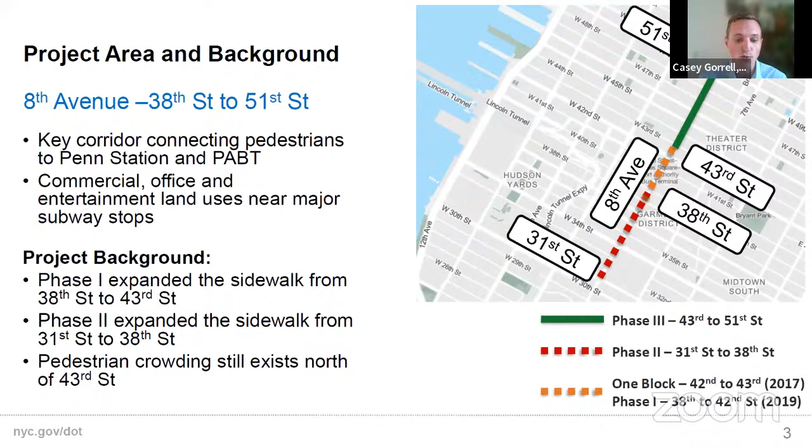And following those two phases, we still identify that there is severe pedestrian crowding north of 43rd Street. So that is what today's proposal is for.

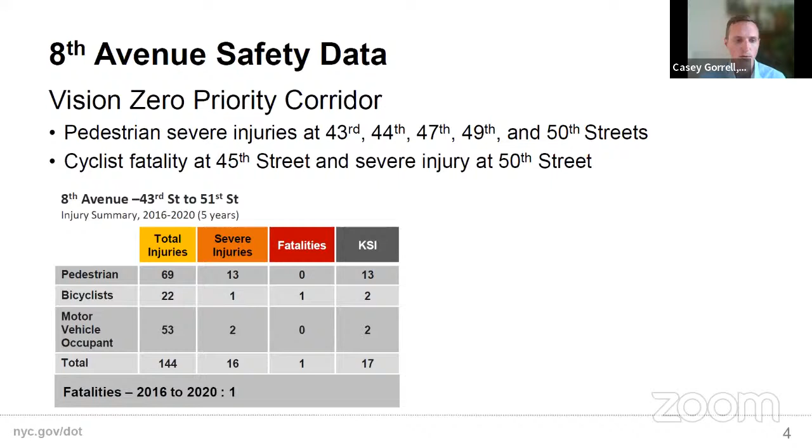Looking at the safety data, 8th Avenue is a Vision Zero priority corridor, and it's also within a Vision Zero priority area. There have been pedestrian severe injuries at 43rd, 44th, 47th, 49th, and 50th Streets, and there was a cyclist fatality at 45th Street and a severe cyclist injury at 50th Street. So definitely an issue with pedestrian injuries and also cyclist fatalities.

Existing conditions: currently, the blocks of 8th Avenue in this section have two 15-foot wide sidewalks, 4 general travel lanes, a parking protected bike lane, and curbside uses that are a mix of parking and loading with bus stops, hotel loading zones, and 3-hour metered commercial loading and parking. So it's our very typical avenue layout in this section.

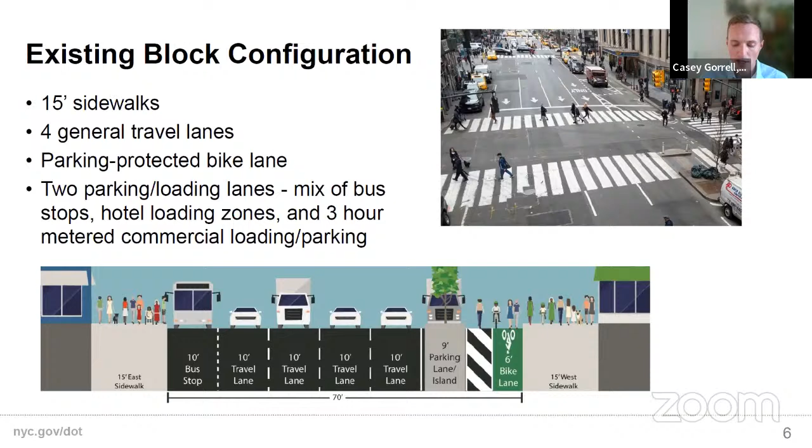Looking at who's actually using the roadway, pre-pandemic pedestrians accounted for almost 88% of roadway users, almost 12,000 pedestrians in the peak hour on this section of 8th Avenue near 45th Street. Vehicles made up about 1,300, or 10%, and bikes a little over 300, making up 2%.

We took recent data in June 2022 as businesses are reopening and office workers are coming back into the city, and found that even with quite a substantial decrease in pedestrian traffic, pedestrians still made up almost 82% of users, almost 7,400 people in the peak hour.

These very high pedestrian volumes and the associated lack of space, because pedestrians actually only have 30% of the roadway allocated to them, results in people walking in the curbside lanes, typically in the bike lane on the west side of the street.

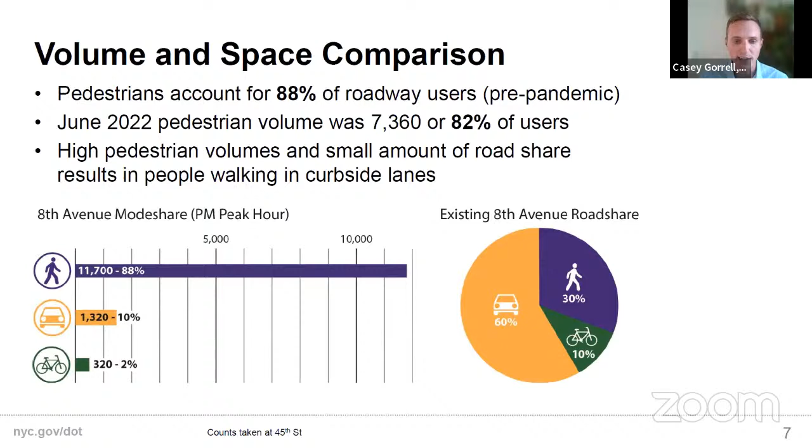So our proposal, similar to other phases, is a large 19-foot wide painted sidewalk extension on the west curb, maintaining the parking and/or lane divider protected bike lane, maintaining 2 general travel lanes, and adding left turn lanes as needed. We'll also be making curb regulation changes to match the surrounding neighborhood context by extending the meter regulation to midnight to match those late night land uses.

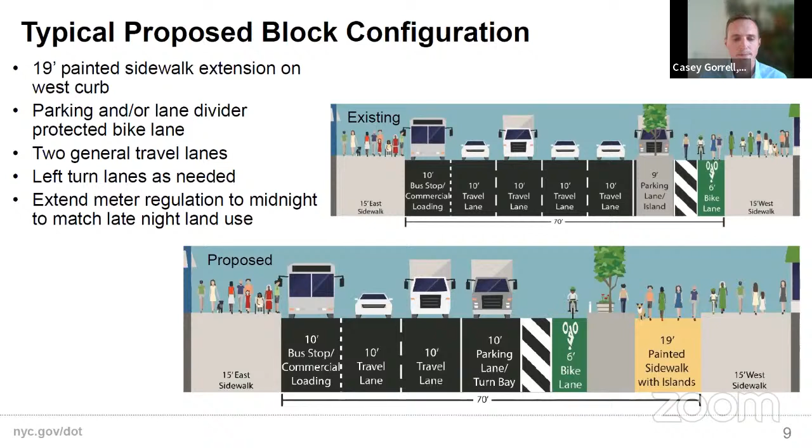I'm going to go through this proposal in 2 block segments to cover the quirks of each section, as not every block is the same. Starting at 42nd Street, where we have the existing sidewalk expansion installed in 2017, there's an existing split phase left turn at 43rd Street with the existing painted sidewalk.

We're proposing to widen this painted space at the corners to improve pedestrian circulation. This includes making an adjustment to the taxi boarding island at Port Authority Bus Terminal. We'll be adding commercial loading spaces to the block between 42nd and 43rd.

This is to accommodate curbside uses and neighboring land use. We see a lot of trucks parked in that turn bay, so there's definitely a need for commercial loading. The bike lane will transition at 43rd Street around the proposed sidewalk expansion that continues between the 2 existing bike islands. We'll also be maintaining the existing split phase left turn at this intersection.

Moving to the next section, this is the block from 44th to 46th. There's an existing offset crossing at 45th Street that was installed as part of phase 1. We're proposing to again expand the sidewalk on the west side, switching the offset crossing to a split phase left turn to separate turning vehicles from cyclists and pedestrians. We'll maintain the floating parking and loading lane in this section to accommodate drop-offs and deliveries.

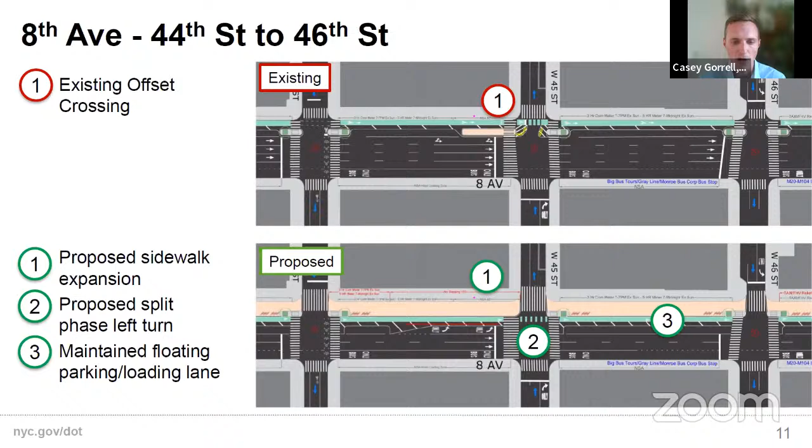Moving down the block, there's an existing mixing zone at 47th Street. The proposal continues the painted sidewalk extension. We're proposing another split phase left turn at 47th Street, and again maintaining parking and loading on the west side, mostly for commercial loading.

Next section, from 48th to 50th, there's again an existing mixing zone. There's also an existing Citi Bike station in the floating parking lane between 49th and 50th Street. We'll be continuing the sidewalk expansion, swapping the mixing zone for a split phase left turn. Because we're expanding the sidewalk so much, we can maintain the Citi Bike station in its current location and add back some commercial loading spaces to try to mitigate double parking issues in this area.

The final section is from 50th Street to 52nd Street. Again, an existing mixing zone at 51st. We'll be changing that for a proposed offset crossing, continuing a partial sidewalk expansion up to 51st Street, and maintaining the floating commercial loading lane on this block as well. North of 51st Street, we transition back to the existing cross section.

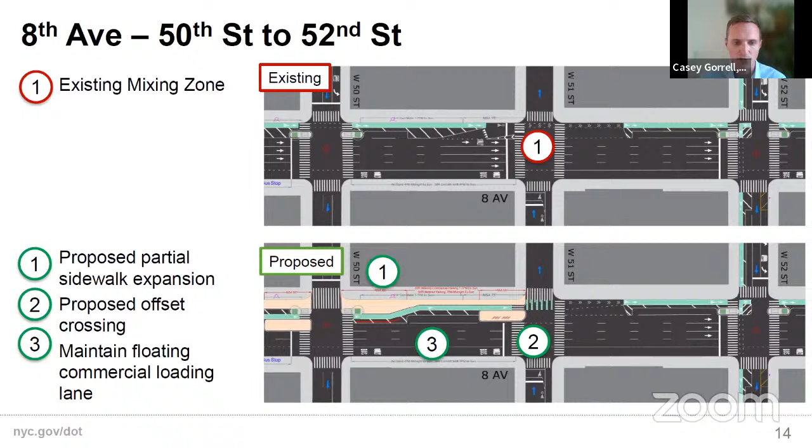Looking again at that volume to space comparison, a reminder that pedestrians make up 88% of roadway users. We're increasing the space they get by 19 feet, upgrading from 30% of the space to giving pedestrians half of the right of way.

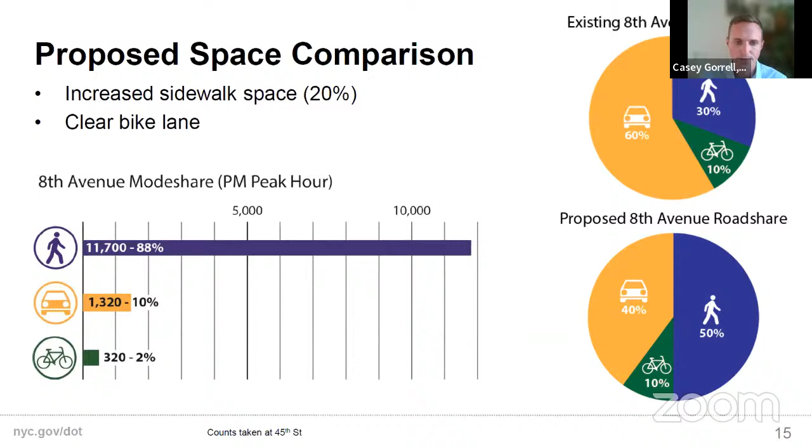As for project timeline, currently 43rd Street to 51st Street is milled and is scheduled to be repaved by the end of July. Following that, we will be installing markings in August and September on that fresh asphalt.

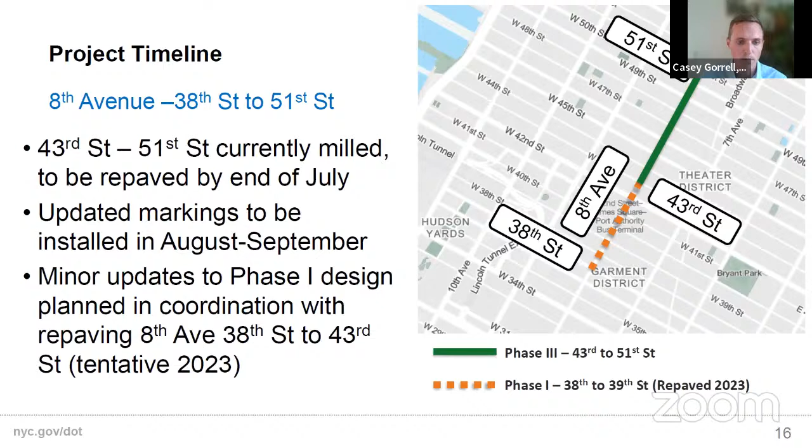As part of this process, we're also going to be making minor changes to the Phase 1 design, which will be in coordination when the section of 8th Avenue between 38th Street and 43rd Street is repaved in 2023. I'm going to give a brief update on those changes, which will happen next year.

So this is the block of 38th Street to 39th Street. As part of Phase 1, we installed the painted sidewalk expansion and upgraded to a split phase left turn. As part of this change, to better match the cross section to the south, which was Phase 2, where we had 2 travel lanes, we'll be removing 1 additional travel lane between 38th and 39th.

This allows us to shift the left turn lane to put in a hotel loading zone and some commercial loading. There's a Holiday Inn mid-block on that section, and they see a lot of drop-offs and taxi use. Accommodating those uses allows us to keep that left turn lane clear and improve visibility in the crosswalks to the north. This will get the standard hotel loading zone treatment with a painted island, which will keep vehicles from entering the bike lane.

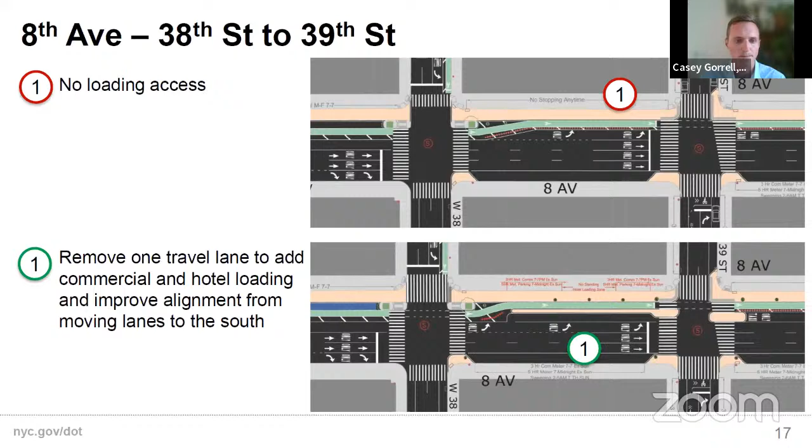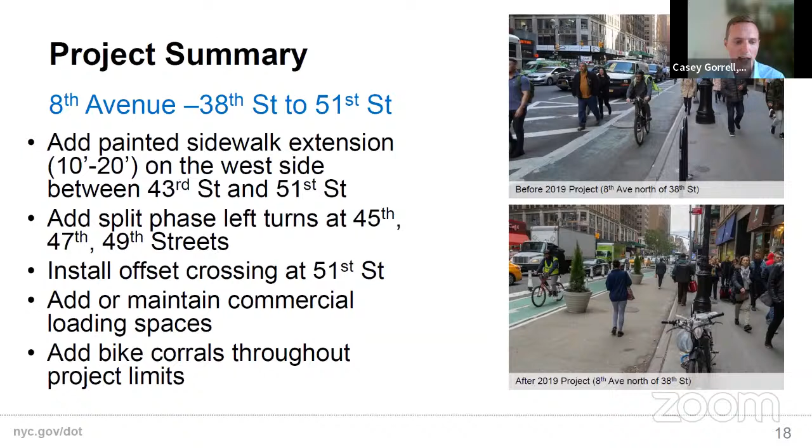So in summary, we're adding a substantial painted sidewalk expansion on the west side from 43rd to 51st Street, adding 3 new split phase left turns, installing an offset crossing at 51st, and adding or maintaining commercial loading spaces to accommodate surrounding land uses. As part of the project, we'll be adding bike corrals throughout the project limits.

So at this time, I would open it up for any questions, and then following that, I can move into the 9th Avenue presentation.

Sure, thank you so much, Casey. I'm just going to reflect some of the conversations we had earlier. We talked earlier about the potential conflicts of the restaurant sheds that are in this area while the work is underway. As I understand it, one of the restaurant operators has already been notified of the work, at least one. Do you have any more color on that topic?

So we're actually having a walkthrough with our open restaurant team tomorrow to go up and down the corridor. So we'll have more information then.

Great. And then can you go back to the slide that shows 42nd, I guess it's 42nd to 44th? So the proposed sidewalk extension is narrower along the block between 42nd and 43rd than much of the proposed area. Is that correct? Yeah, so one of the comments at the previous meeting was to widen that space.

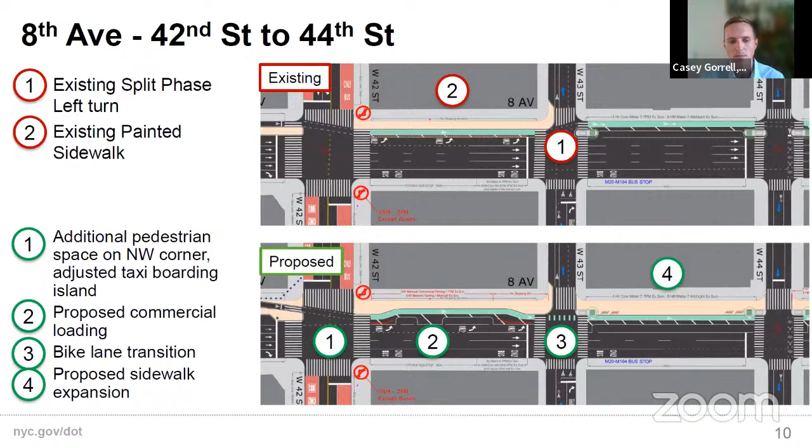So we actually ended up doing kind of large curb extensions with the painted treatment at both ends, which increases storage capacity when people are queuing for the signal. So that was one change we made - those bulb outs are a little widened at the corners. Yeah, it'll be 20 feet wide at the corners.

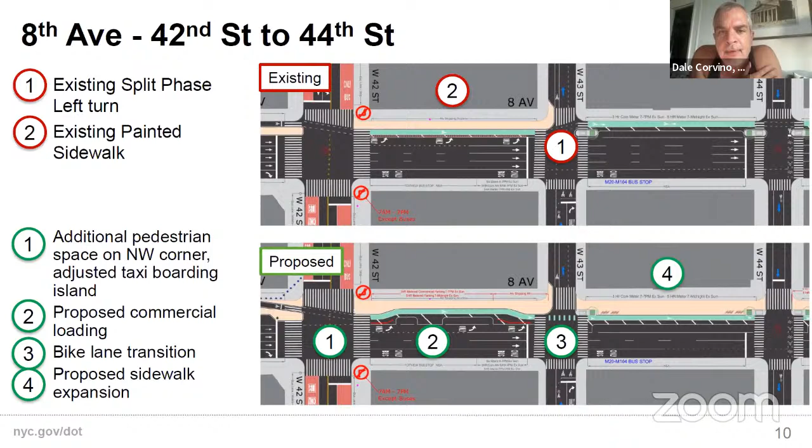Right, and you mentioned that the block between 47th and 48th, you're looking now at loading areas or commercial parking. I can't remember, I know we discussed those options. Yeah, 47 to 48 is going to be 3-hour commercial meter commercial loading.

Great. And then I think these plans indicate along the bike lanes that there are flexible delineators or other forms of vertical protection? Yeah, so wherever there's no floating parking, we're proposing what's called Qwick Kurb. It's the more robust vertical separation that's currently in most of Phase 1. So we'll be doing that wherever we don't have any parked cars or any parking protection - we'll have a vertical separator.

All right, great. I'm going to open it up to questions from the committee, starting with David Warren.

Hi, thank you for your presentation, I appreciate it. I have 2 questions. One is on 8th Avenue - when I'm riding between 31st and 33rd, somewhere mid-block it starts out for pedestrians, and even sometimes the Citi Bike people block it off with stuff, and then we go into the bike lane. Then I'm confused because at about, let's say, at the light where 32nd would be, it wants you to veer back left to where the pedestrians once were and go straight up. I don't know if it wants that, because otherwise it would lead you into traffic, but it's very hard to finesse the way the turn is and the way the cement dividers are. So I don't know how you plan to either communicate it better or move the dividers or what. My second thing is, I think the pedestrian protections are great, but what are the protections you're going to have for cyclists? How are they being - what is the protection? I hope it's not plastic bollards.

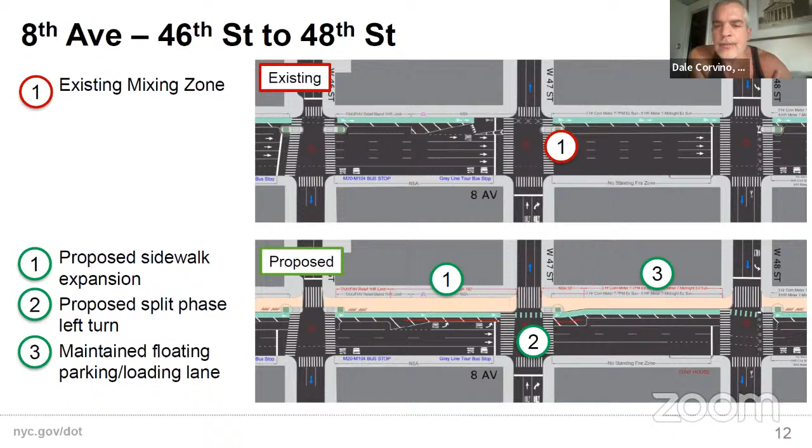Yes, I did itemize that, David, but I'll rely on all of you to make sure we've captured it once we write the letter, because I want one section of this letter to discuss current conditions with respect to the current construction enclosures and staging areas, so that the bike lane is maintained during that period. Because I'm very concerned about this construction, staging, and all that.

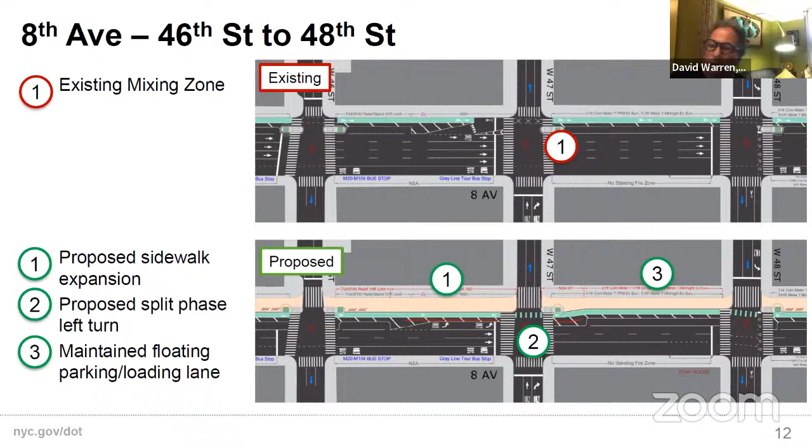These guys are weasels, so we can't let them get away with it. We won't use the word weasels, but we will ask DOT to bring these concerns to bear, whether it's DDC or Con Ed.

So that's the motion. Can we have a vote on that motion? We've had a second. All in favor of that letter to capture our discussion? Any opposed? Any present not eligible? No. Okay, thank you so much for the presentation.

I suppose now we can move on to your portion of the 9th Avenue presentation, then we'll bring in Vornado. Then may I ask you one quick question, if you don't mind?

Yes, sorry. We spoke about making this change permanent as far as the sidewalk extension is concerned. Will we be writing a separate letter about that? I don't know if that's a separate letter, or if we can say within that letter, we look forward to the capital project, which would have expansions of sidewalks on both sides.

And also, to Carl's point, about potential expansions to the north of the extended sidewalk. I think it can be captured in this letter, and I'll rely on you, Viren, to read through it once we draft it to make sure I'm capturing all your concerns, because I do think that's important. These temporary build-outs are not perfect, but I think they set the stage for future improvements.

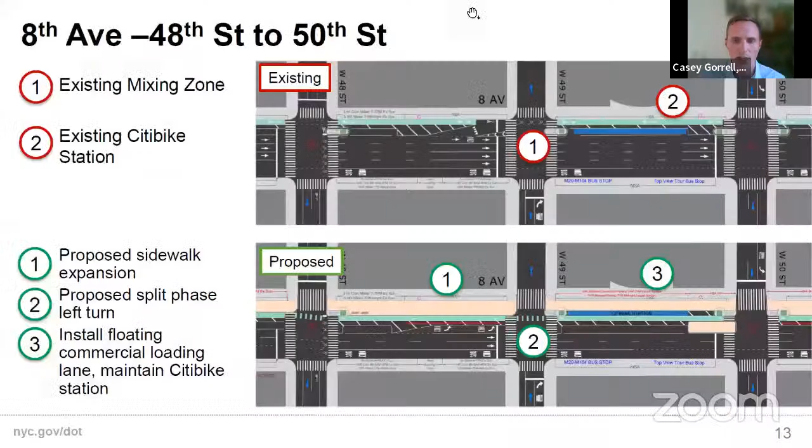Yes. Okay, so Casey, back to you on 9th Avenue. Let me get everything back. This one's going to be quick, because Vornado is actually probably going to go into much more detail than I am.

Hello again. I'm going to present an update on 9th Avenue from 30th Street to 34th Street. A little project background: there's been a long-standing DEP project to upgrade water mains throughout the district. I'm sure everyone's aware of that work. It's been a huge undertaking and probably a very big pain. There's also been the ongoing redevelopment of Moynihan Station on the blocks between 31st and 33rd.

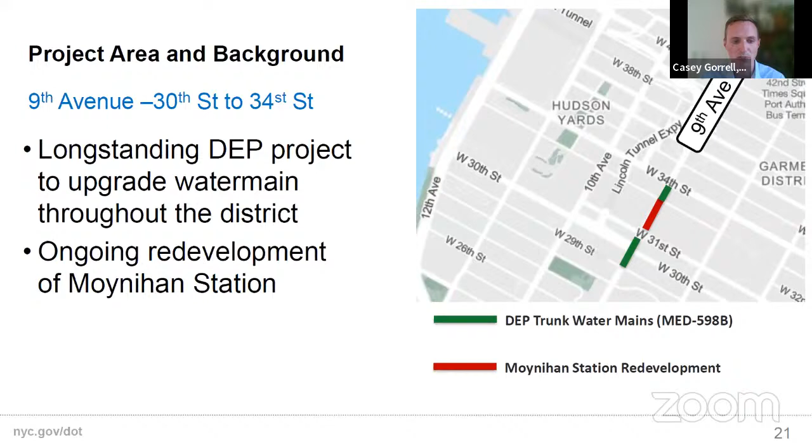So I'm going to show here what is considered the existing condition, although that's a bit of a misnomer because it probably hasn't looked like this for almost 10 years. This is technically what would have been put back into the ground if nothing was changing. We are proposing a series of changes in coordination with the Vornado work, to be implemented as part of the DEP roadway restoration from 30th to 31st and from 33rd to 34th.

Currently working from south to north: at 30th Street there's an old existing mixing zone for southbound left turn onto 30th Street. Prior to construction, there was a USPS access for a section of 9th Avenue heading northbound, essentially to what would have been 32nd Street. This is no longer needed with the change from the USPS Farley Post Office into the Moynihan Station.

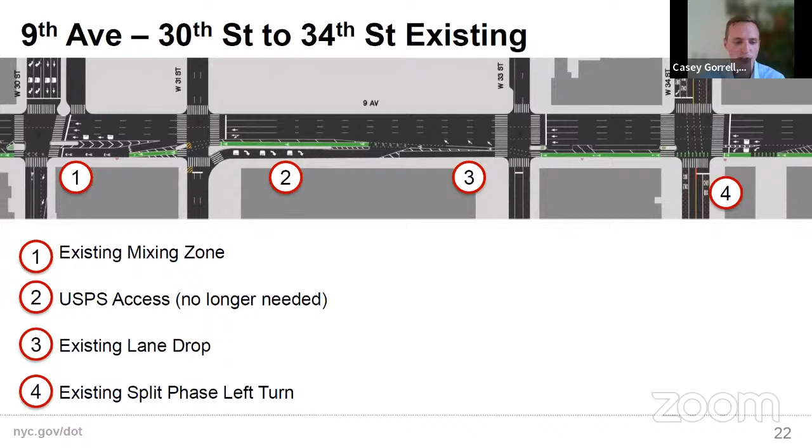Looking at bullet number 3, at West 33rd there was a substantial lane drop, going from 5 lanes to 3 lanes, 5 lanes to 4 lanes - a big pinching of 9th Avenue, mostly to accommodate that USPS access. And then at 34th Street, there's an existing split-phase left turn.

So under the proposal, again working from south to north, we will be converting to an offset crossing at 30th Street and widening the eastern sidewalk with temporary materials. However, at this location, we are proposing concrete islands as part of the DEP restoration.

They'll be shifting the islands to their new position to allow for the wider sidewalk. From 31st to 33rd, Moynihan with Vornado will be widening the eastern sidewalk and adding the mid-block crosswalk, which has already been completed, and constructing 3 pedestrian islands.

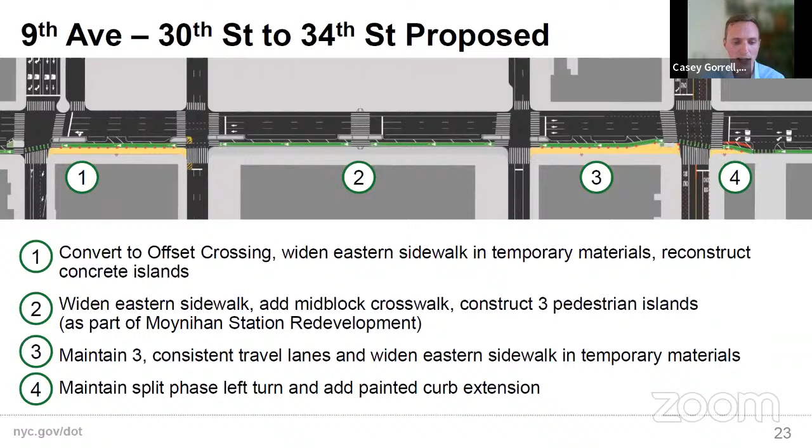Between 33rd and 34th, we'll be maintaining 3 consistent travel lanes and widening the eastern sidewalk with temporary materials to create a consistent 9th Avenue roadway profile. At 34th Street, we'll maintain the split phase left turn, but add a painted curb extension to better align the bike lane around the new islands, along with painted sidewalks.

Just a quick summary: we're widening sidewalks between 34th Street and 30th Street, creating consistent and clear travel lanes, and creating consistent bike treatments at intersections through this portion of 9th Avenue.

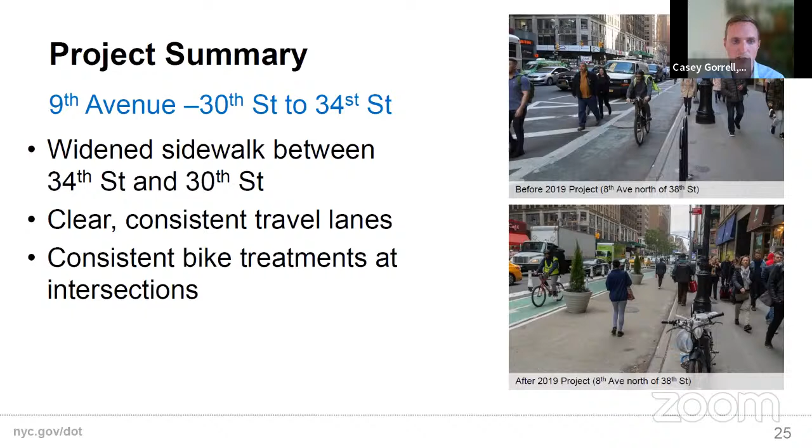So I can also open up for questions. If you have any questions regarding the blocks between 31st and 33rd, it might be better to wait for those once Vornado has presented. I think perhaps what we'll do is go right into Vornado's presentation, then we can discuss it as a whole. Yeah, that works. I can stick around.

And who do we have here at Vornado? Hi, Alan Reagan, thanks for having us tonight. I've been involved with the Moynihan Station project since 2017, not as long as some others, but I've worked on the train hall portion and the private development portion. Joining me tonight is Michael Grieser from SOM, which has been involved with all 3 phases, and Jake Eckersley from Langan, also involved in all 3 phases of the project.

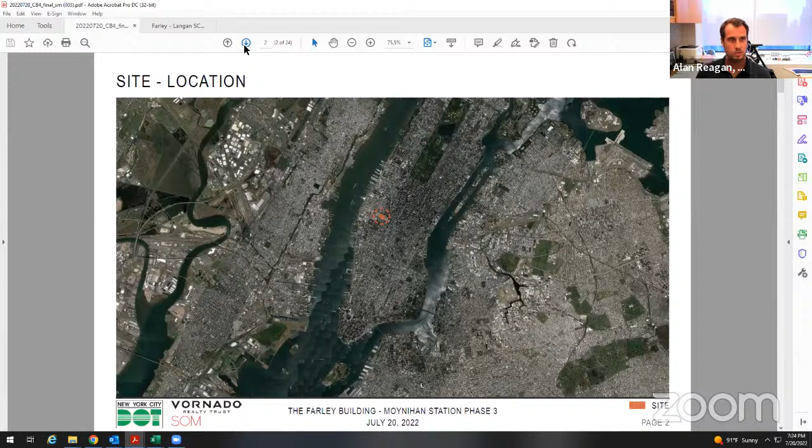Okay, so just an overview shot of the building. Everyone, I think, knows where the project is, but just in case, it occupies the full block between 8th Avenue and 9th Avenue from 33rd to 31st Street. It sits on top of the busiest transit hub in the country and is an extension of Penn Station.

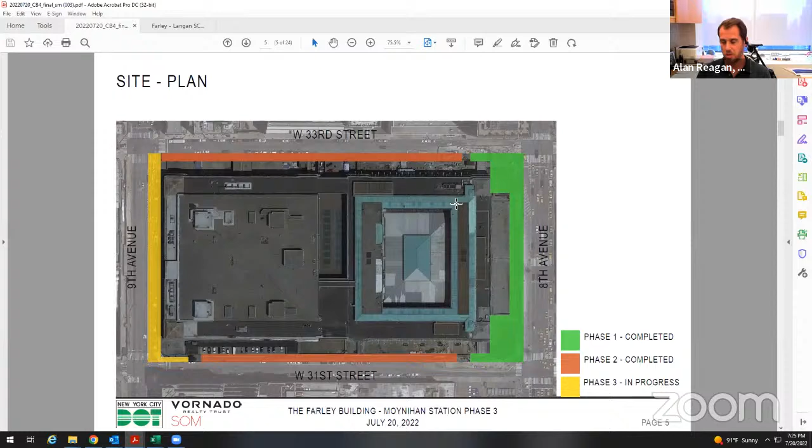That was completed in 2017. Phase 2, in orange, was completed at the end of 2020. That extended the bollards down 33rd and 31st Street and put the distinctive sidewalk at the 2 other mid-block train hall entrances. Just some completion photos of what is there now.

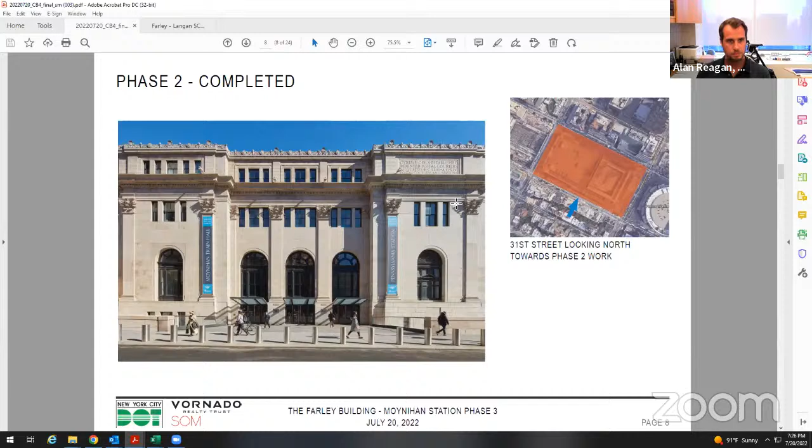This is the 31st Street mid-block entrance. This is the 33rd Street mid-block entrance. Just another view.

Section through the building, showing it connecting from 9th Avenue to 8th Avenue, and connecting over to Penn Station underground.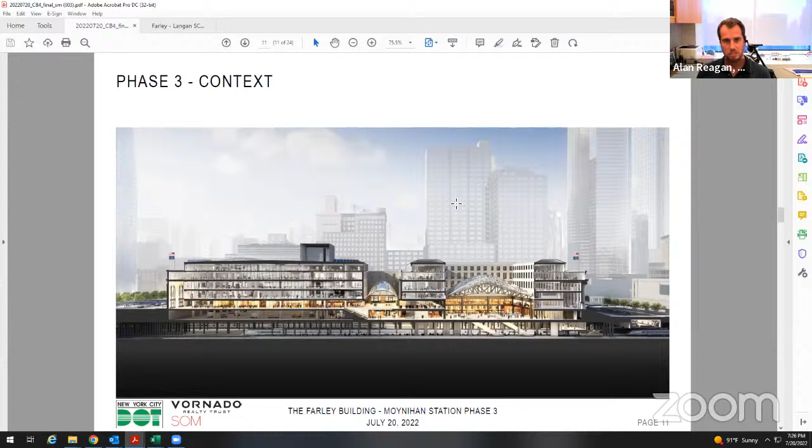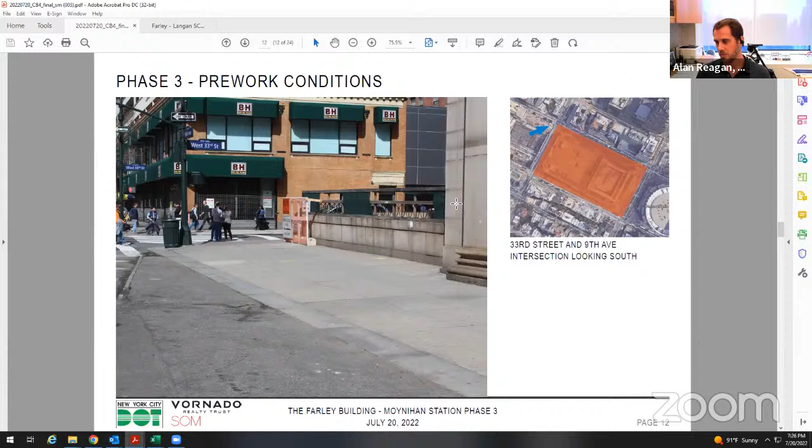These are the pre-work photos, what we like to call it. It wasn't the existing conditions because as you walk there today you'll notice the condition doesn't exist. But these are the pre-work conditions where USPS had the reverse drive lane on 9th Avenue, where they would come down 31st Street and turn up 9th Avenue to get to their interior loading dock, effectively at 32nd Street.

As part of this project, we relocated all of USPS's loading facilities onto 31st Street and provided them a below-grade ramp that goes from the street down to the concourse, moving all of this loading facility that was on the first floor down into the cellar of the building. That frees up this area, allowing the sidewalk to be extended, and these 3 grand entrances to be converted to the 5th train hall entrance along 9th Avenue.

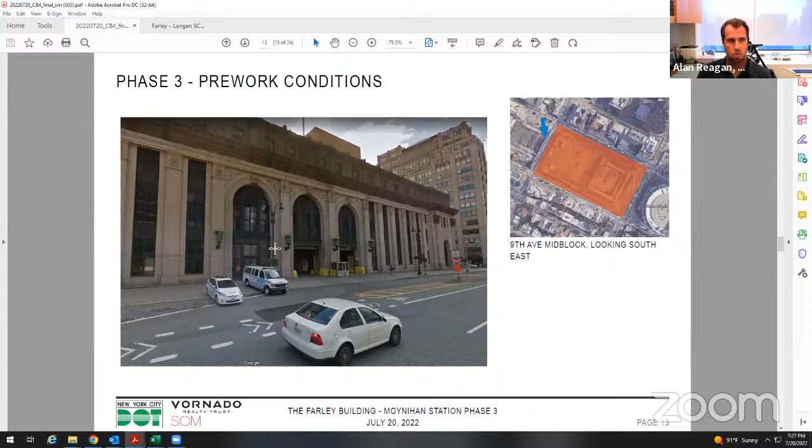And it aligns to Manhattan West Brookfield's Park directly across the street, where there's a temporary crosswalk today near where the permanent crosswalk would go. This is just another angle from 31st Street looking up 9th Avenue of the reverse drive lane for USPS.

Everything, the two on 8th Avenue and the mid-block paving on 33rd and 31st Street, that's all within the property bounds. The building is set back and surrounded by moats on the north and south sides, and the grand steps on 8th Avenue. The difference is the building was created in two separate times. When the back building was created, it was effectively flush to the property line.

So we're here for the community board to ask for the distinctive sidewalk. We're also giving you a preview of the bollards, although we know we can't officially ask for bollard approval until DOT is further along in the revocable consent process. We thought it was important that the community board, having seen this two other times, knows we're ready to start the work once we get through the DOT process for the bollards.

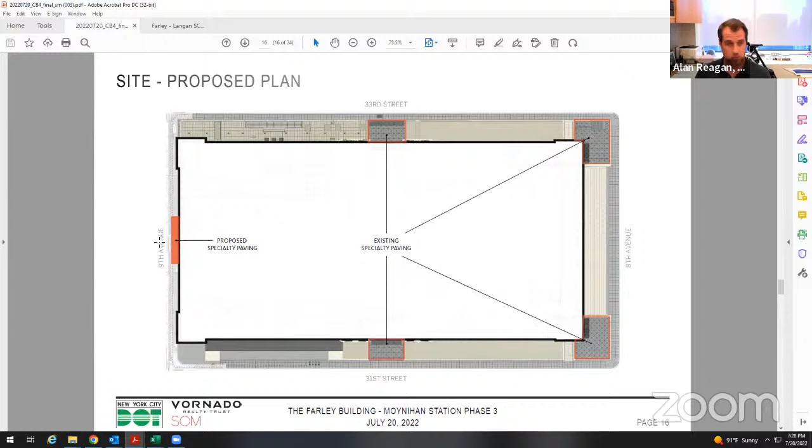So this is just a blow up of where the distinctive sidewalk is. It'll be 90 feet by 34 feet, roughly speaking, and it'll align to those 3 grand entrances that link 32nd Street to the train hall.

So all of this sidewalk will be maintained by the condominium building. It's currently managed by C&W, which handles all of the sidewalk and the interior common spaces of the building.

Additionally, we will be extending the bollards that go down from 8th Avenue and on 33rd and 31st Street all the way across 9th Avenue. Part of this project has involved a lot of back and forth because 9th Avenue has a ton of utilities in the street. It's also a shallow street because of the viaduct for the trains. So we've been working with Casey and John at DOT on geometry that works for everyone, along with DEP on the water main relocations.

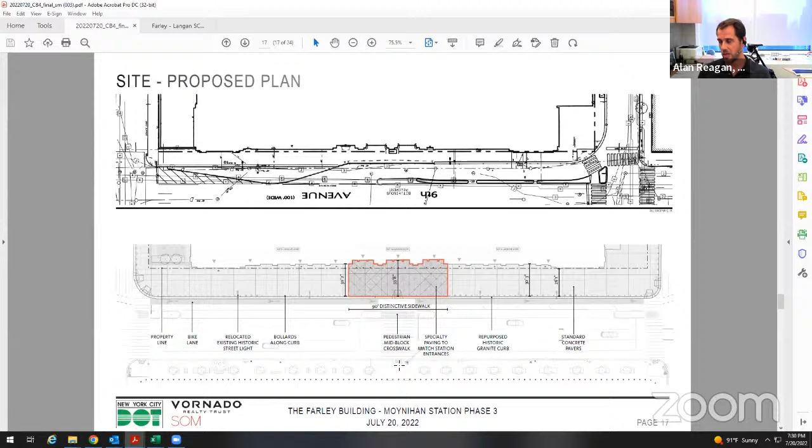As noted previously, the building has standoff distances on 8th Avenue, 33rd Street, and 31st Street. In order to give it standoff distance for security measures, we need to extend the sidewalk. We're extending the sidewalk, effectively grabbing the reverse turn lane that's no longer needed, while still maintaining the bike lane, giving a grander pedestrian experience, security from bollards, and installing the permanent mid-block crossing, which has been fully coordinated between our building and Brookfield on the west side.

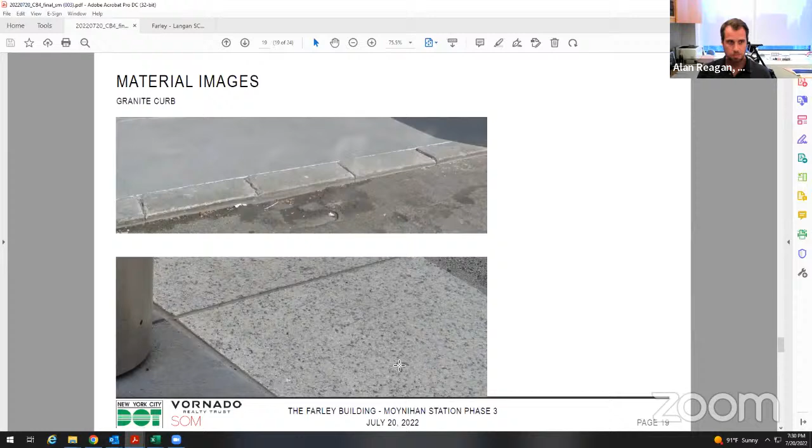This is just information on the material we're going to use. These are photos of the existing granite curbs. We're going to put back granite curbs. We're going to use the same bollards as phase 2 and phase 1 used, the same bollard covers, same rating. And this shows the full extent and array of the number of bollards we're putting there.

We've worked closely with DEP to fit the bollards in over their infrastructure. Con Edison is doing utility relocates, which they'll pick back up after the summer moratorium, sometime around end of August or beginning of September, to allow us to start this work once we get through the final DOT process.

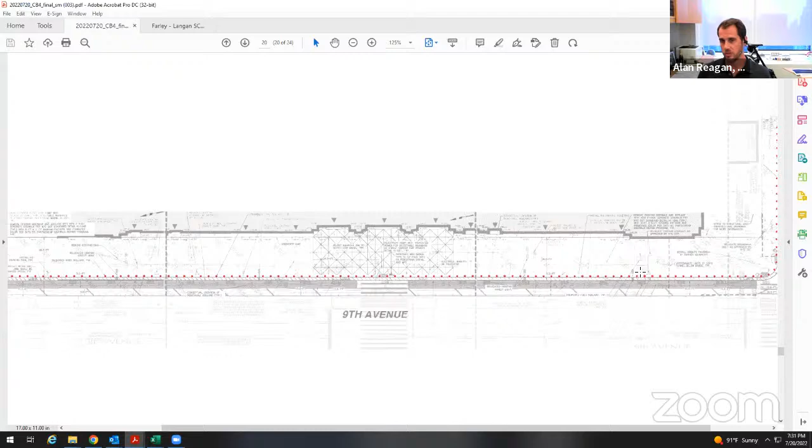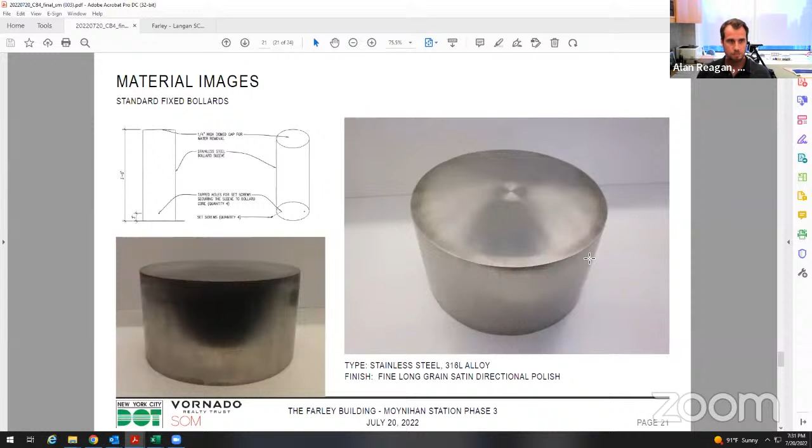Sample of what the bollards look like. Any questions, we're going to replicate the existing covers that are there today. Just showing a section through it and the spacing of the bollards.

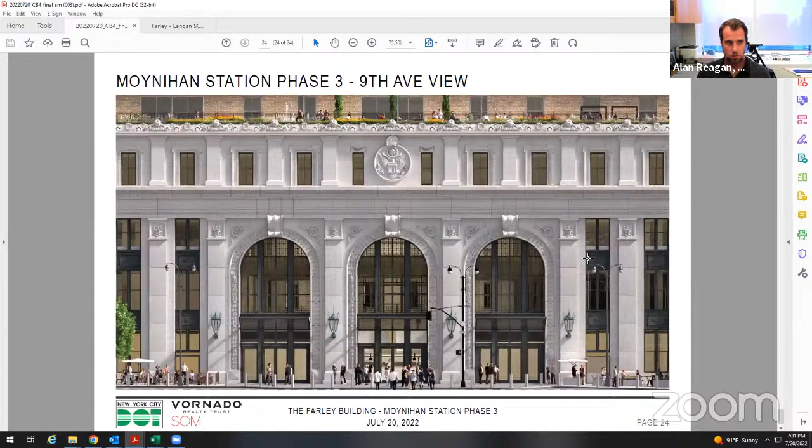I know I went through it relatively quickly, so I'm happy to go back to different slides or answer any questions you may have.

Okay, thank you for the presentation, Alan. So let me just reflect a couple of these comments. All right, so...

A couple of things - just so we know, we'll ask DOT about the vertical protection for the bike lane, and I assume it follows the same guidance in which you're providing it where possible, absent where there's parking activity.

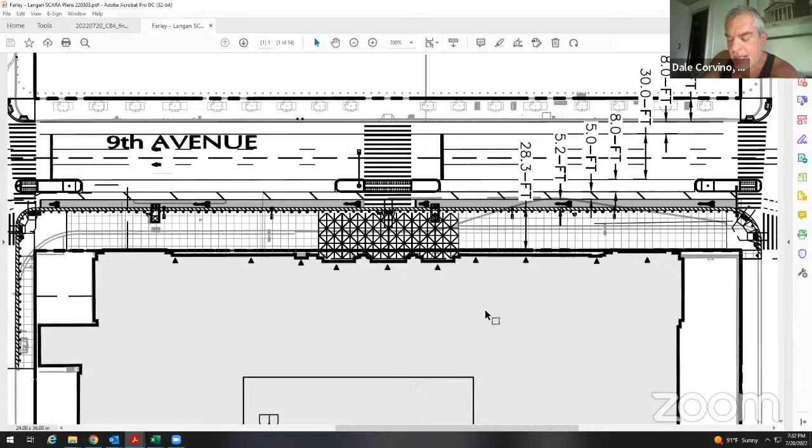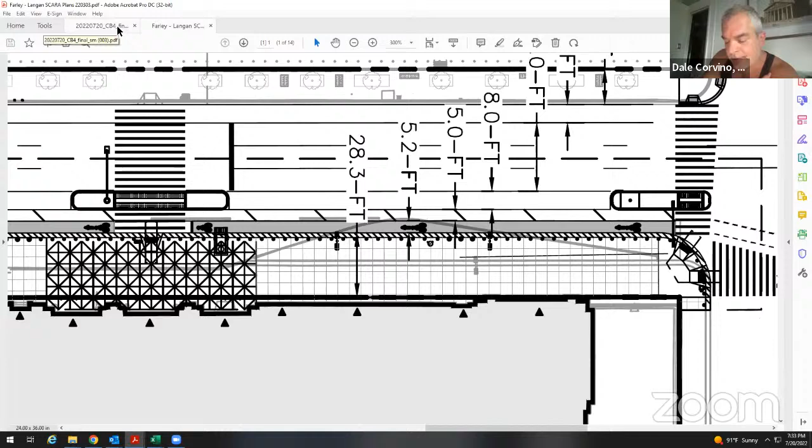And then also, this is again for DOT - we brought up the issue of the left-hand turn lane north of 34th Street essentially being squatted in by Midtown South for police vehicles and private vehicles. And it's not just the turn lane, they also squat in an active travel lane. So anything you can do to address that - our requests have fallen on deaf ears - but it really does create hazardous conditions because regardless of the 2 lanes of parking the PD has commandeered, people are still making that turn onto 34th Street.

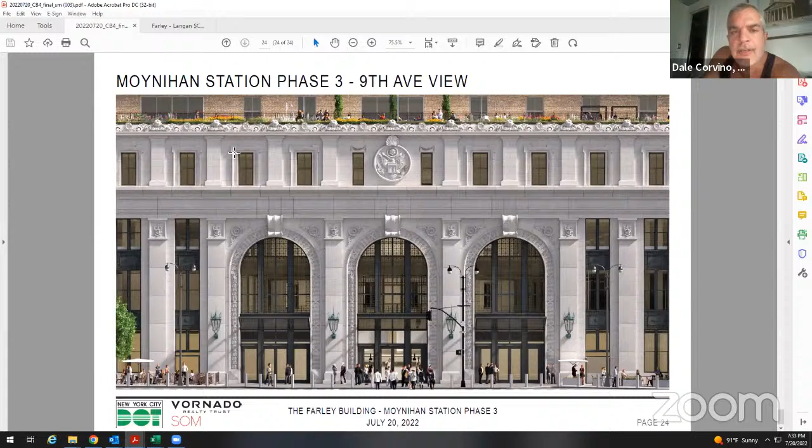As for the bollards - Alan, can you go back to the plan that shows the corners? I just want to make sure there's no interference of the bollards with the curb cuts for ADA accessibility. I know sometimes it has to be finessed. Go ahead, sorry, yeah.

No, go ahead, I'm sorry. I didn't mean to interrupt you.

Only to say we've encountered this before, and it's usually something that has to be finessed so that your clearances are met, but also so that the curb cuts, the two curb cuts in both directions, are usable. We understand. We've gone through great length and we'll continue to do so during the shop drawing and construction phase to ensure that they are usable.

Yeah, it looks like it, at least on this corner. Yep, same on both. I can go to the other corner as well. Yeah.

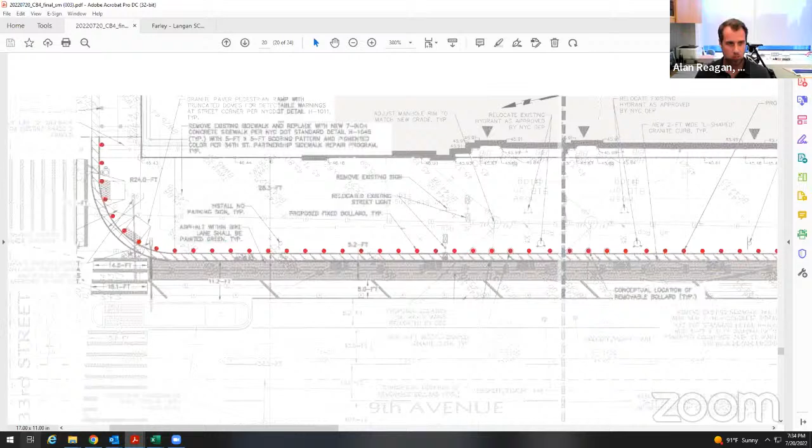We've had to, in addition to all the normal stuff you have to go through, this part of the site is actually rather shallow, so it's even more complicated here, but we've been able to get it to work, and we'll continue to make sure that it happens that way through the process.

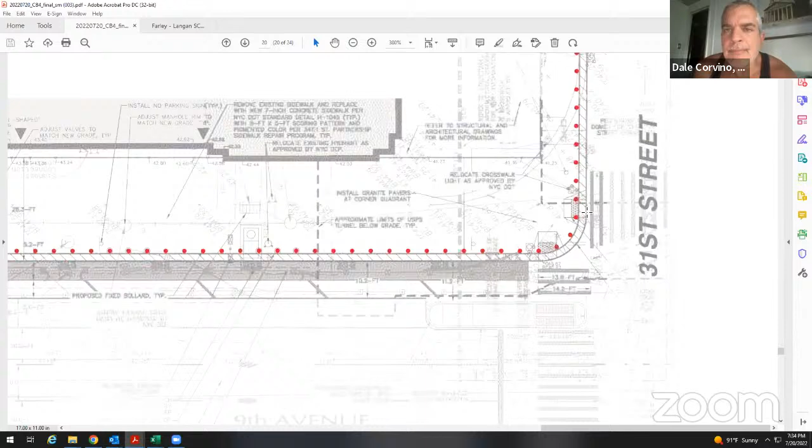All right, great. And David, I see your hand up. I'm sure you have questions about the current conditions of the bike lane. I certainly do, thank you.

There's several things regarding the left turn on 30th Street that have to be addressed now. That can't wait. Someone's going to get killed or severely injured because the motor cars do not see cyclists when they make the left turn.

I ride that every day. I've had so many near misses. I've had more lives than a cat with this. So this needs to be addressed like today.

However you guys are going to do it, maybe have them make the left turn from a wider angle, even during temporary, all this construction is temporary, whatever, fine. But let's not play around with people's lives.

The second thing is the bollards. You put in plastic bollards from like 33rd to like 30th Street. A couple of months ago, it took us months to get them to extend it because motor cars were parking in there, since they didn't realize it was a bike lane.

I actually took pictures of what looked like a construction truck, between 31st or 30th, running over the bollards and parking on the bollards.

I contacted DOT. DOT said, well, that's not in our jurisdiction. I think this is maybe Vornado's or DOT's or someone else's wheelhouse, but we need to know who. If we are going to stop people from damaging or vandalizing these bollards, who is in charge of it? I have the photos.

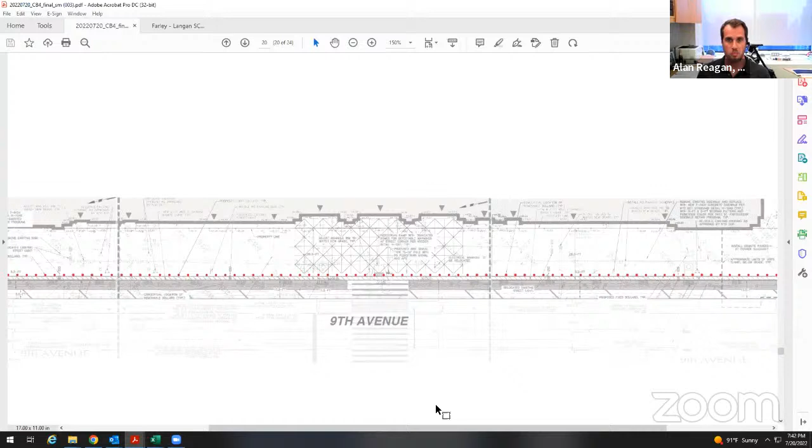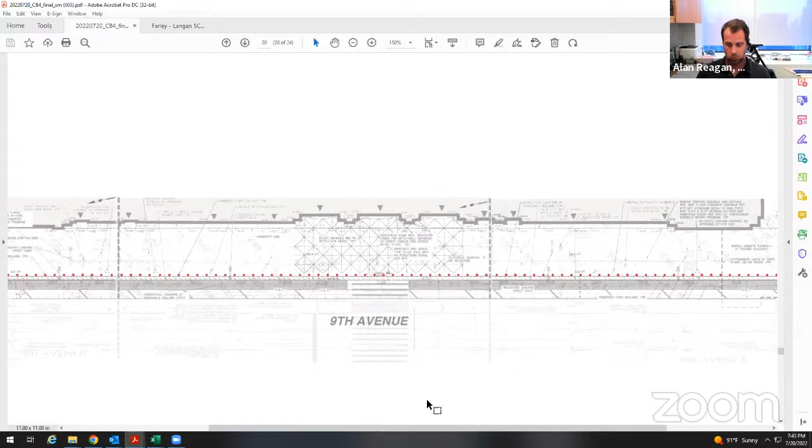We can certainly make a request in that direction, Bjorn. Yeah, I would tell you that it's taken us the better part of 2.5 years, close to 3 years actually at this point, working with all the agencies to get here. We've looked at every possible thing. From a beautification standpoint, do I think planters are better? Absolutely. But from a security standpoint for this building, given what it is, there were very limited options because of the infrastructure challenges we have to work through. We had raptor bollards on 31st Street, which I know are quite controversial, and the community board didn't like those, but that was the only way to protect the building. So we have studied various different options. It really comes down to what infrastructure we're working around to make it happen. I would say from a pedestrian standpoint, the sidewalk is now, I don't want to misspeak, but we're going out, it's going to be a rather gracious sidewalk. So the pedestrian and public realm improvements will be vastly improved in this area and plenty of walking space on 9th Avenue between 33rd and 31st Street.

No, I totally agree. But I mean, it's just the manner in which the bollards are actually hindering people's movement, and this whole pedestrian experience is actually hindered by it. And there are absolutely great solutions.

If you really look at Midtown Manhattan and our district, the number of bollards in this district probably tops the list. So all I'm saying is that from a pedestrian and experiential point of view, I think collectively we should come together. There are ways to combine sidewalk benches with sidewalk planters and a whole bunch of other solutions that do exist. The city has used them in other parts of the world. I think we should take a lead on this. That's all, thank you.

Jesse. Personally, I think weaving through bollards is an excellent form of exercise. So I don't know what you all think. I'll admit.

This is just a quick clarification, probably a question for you, Dale. David asked earlier two different questions about the current construction status. His first question was about the turn on 30th Street. We were saying for both of David's questions that those need to be addressed by DDC, and our current presenters have no say there. Well, the signaling and the turn would be DOT. The insistence that the bike lane be maintained through all phases of construction looks like it's going to DDC, but our partners at DOT can apply some pressure, and Alan at Vornado has offered and has said you need to keep on top of this as well.

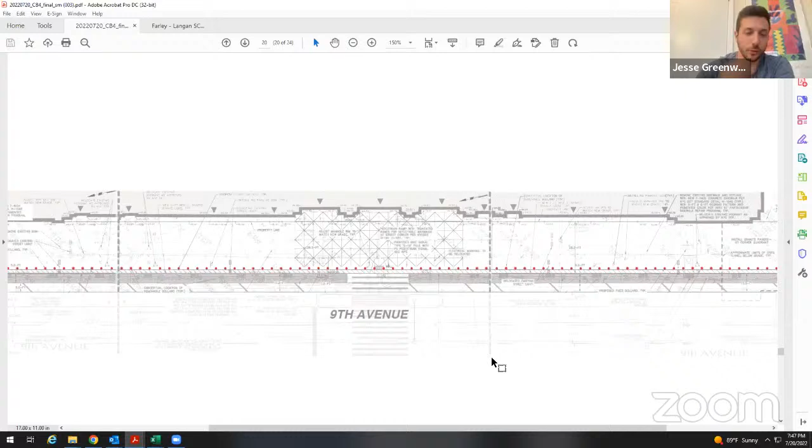Though, from David's warning, that might be something to prioritize as you start this, if it's that significant of a safety issue. Is there a way to prioritize that, or when you go and do the scope, can you start with it? That's a good question, Jesse. Casey, how would you prioritize that to say this is the most urgent need within this scope?

We would have to talk to the contractors doing the construction. I do know that they are laying out the islands for somewhat imminent construction, so that is going to be happening very soon. There will be concrete protection in the very near term. The signal changes are probably going to happen toward the end, it's usually one of the last things to happen. We actually need to coordinate whether that's going to happen through the DEP project or if it's going to be an in-house DOT improvement as part of this geometry change. It's part of the alphabet soup of working on any project within the city.

Just remind us, what is the timeline, the projected timeline for completion of this particular scope?

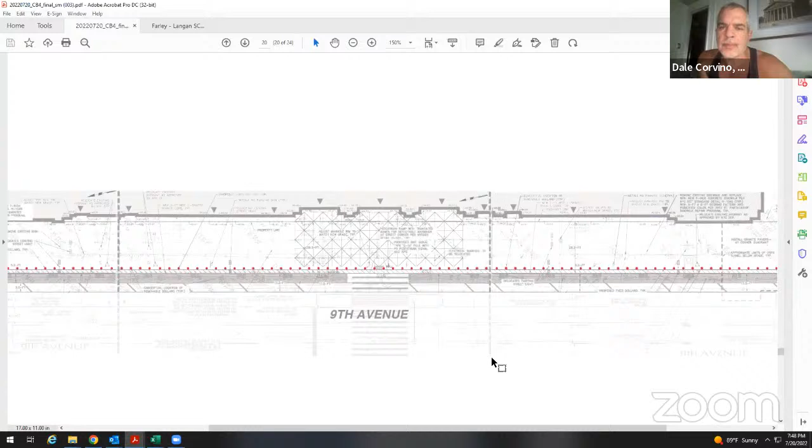Outside of the Vornado work, my understanding is that by the end of the year it would all be complete, but that's something I will double check with the contractor. They're wrapping up. They were very insistent that we get them the drawing as soon as possible. Okay, well, that's promising.

All right, Jesse, did you have any more questions, or else I'll move to Charlie. Thank you, Dale. Nice to see the improvements that are happening here. Thank you both for the presentation. I'm curious if we could just quickly go over the bike lane protections on these stretches now that we've seen both presentations, just to understand what they are. I know that rendering did not include a bike lane, so if we could kind of walk through it.

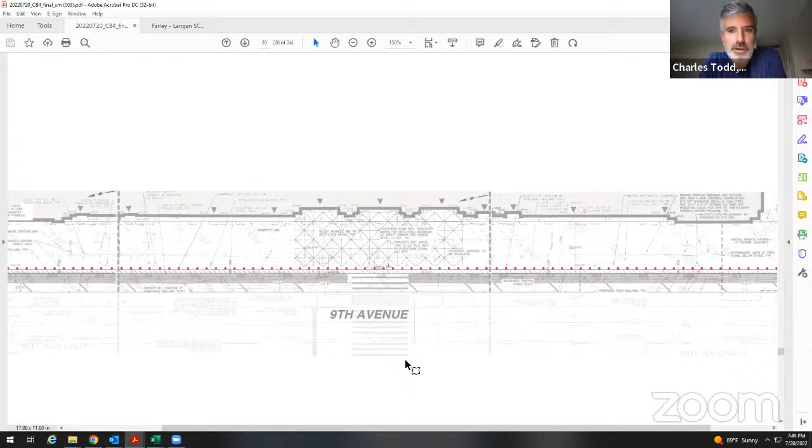And then just one question, and this is maybe pie in the sky unrealistic, but we have these 200 beautiful bollards, and they're protecting the building and the pedestrians. Is it not feasible to move them over and protect the bike lane as well? Could they keep the cars out of the bike lane too? I mean, I ride home on 9th Avenue. I would love nothing more.

It's my bike that I'm going to ride home from all the way downtown tonight. The amount of stuff in 9th Avenue within the street, the ability to put a foundation in there to hold something that would divert a car is, this is like a Swiss watch under the asphalt, and pretty crazy.

So, to answer your question, we have concrete islands at both 33rd and 31st Street, and we have concrete islands separating the mid-block. We have a buffer zone, I think it's a 5'2" wide bike lane, then another 5 foot of striped protected area, and then the islands create another 8 foot buffer.

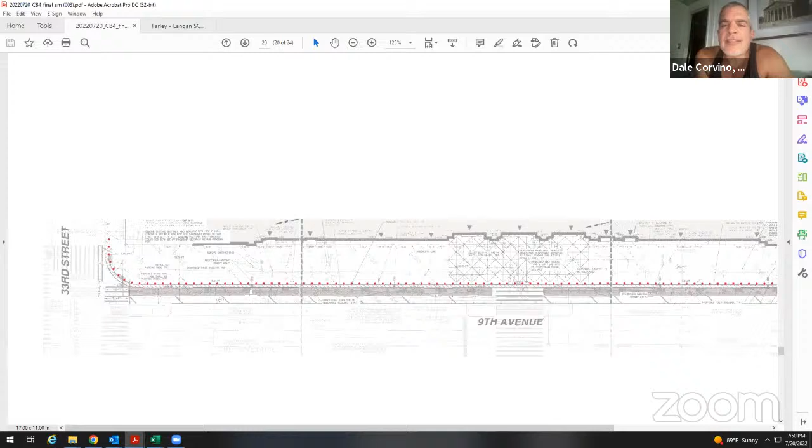Can we go between the first drive lane? Is there? Can we go back to the... I'm sorry, can we go back for visuals? Can we go back to the bike lane slide? I guess that was... You could go back to my slide that has everything. Yeah, that would be great. We can go back to Vornado's presentation. Yeah, perfect, okay.

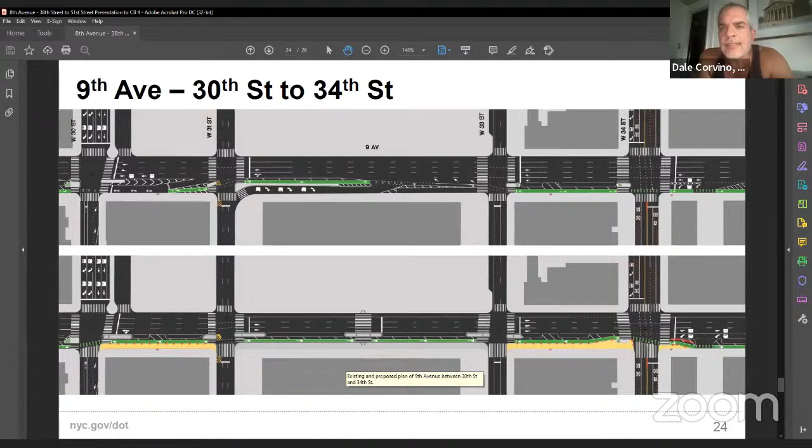I know we're pulling somewhat double duty for this phase, because that's parking in between the concrete islands. Is that parking? Yes. Got it, so it's parking protected or concrete island protected. And then for the blocks north and south that aren't part of the Vornado construction, for the most part, the block between 30th and 31st will be parking protected the entire length. It's not shown on this drawing, but the block between 33rd and 34th is mostly parking protected in front of B&H, and that one small segment where the bike lane goes around the existing concrete island will have quick curb, the more substantial vertical elements.

And then there's also delineators between the pedestrian space and the bike lane. Oh, I see, so that's right up along B&H. Yes, parking protected for about three quarters, and then there'll be quick curb for the remainder. Great, that answers my question. Thank you.

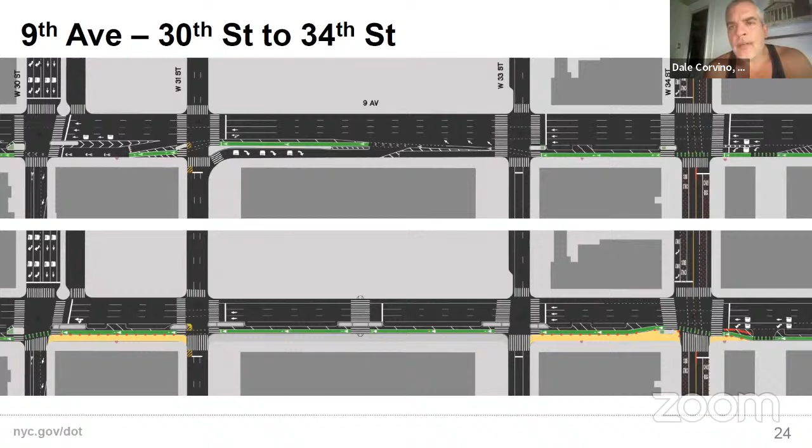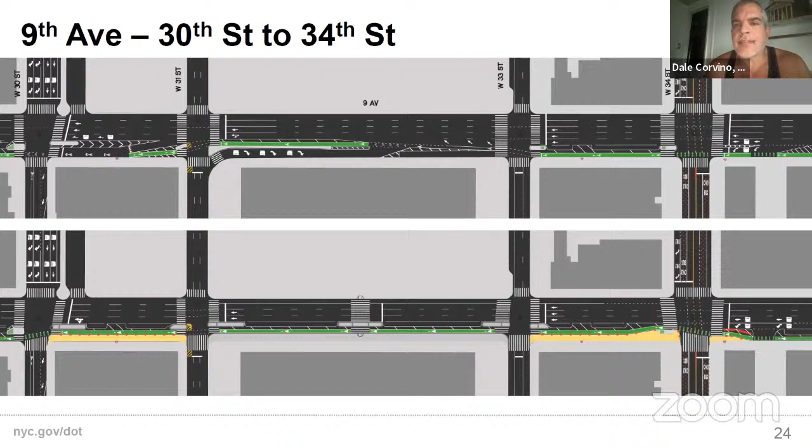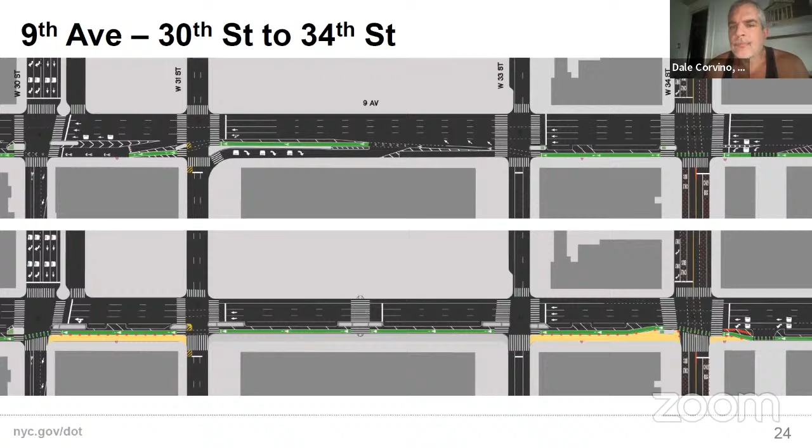All right, so we're looking at a letter to DOT to raise the concerns that have been raised with regards to the current conditions and their plan as they are proposing to implement it, and a separate letter to Vornado with respect to their sidewalk treatment and the bollards. On the first letter, do we have a motion? So moved. And a second? Second. Okay, all in favor? And again, I'm going to count on you to make sure we capture all of the concerns raised in this meeting.

Any opposed? Any P&Es? Present not eligible? No. Okay, and as to the letter to Vornado with respect to their presentation on the sidewalk treatment and the bollards, with some language to suggest looking at other technologies or implementations of security bollards that are more pedestrian friendly, do we have a motion? Make the motion. Second. Okay, so all in favor of that letter?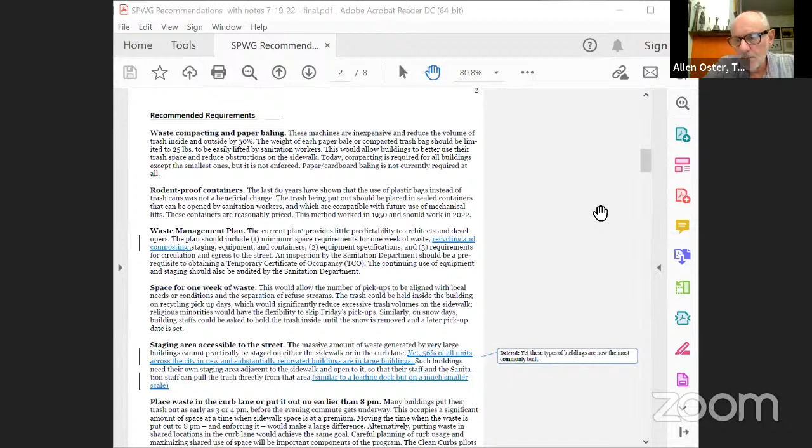Staging area accessible to the street. Commercial buildings primarily use loading docks, which obviously would not be applicable for residential, but we're looking for a different type of pickup from sanitation, especially in the larger buildings. Something similar to a loading dock where a sanitation truck can back its way in, pick up the garbage, and then leave the premises without having the garbage, especially in the larger buildings, on the sidewalk.

An interesting story about when garbage goes out. 4 o'clock is the time that garbage is supposed to go out. Usually it goes out much earlier than that. We're asking sanitation to move that to a later time, 8 o'clock, which means it'll go out probably a little bit earlier than that.

It seems that in certain parts of New York, certain communities requested an earlier startup time for religious purposes. And instead of maybe carving out that particular location, area, or community, it became a citywide time for trash put out. Next slide, please, Janine.

So basically, these are some of the requirements that we're looking for in new and renovated buildings. Design requirements: interior or contained waste storage space sufficient for one week of waste. These are for smaller buildings, 10 units or less. Waste compacting and paper baling in new construction.

These smaller buildings were never built with chutes for compacting. It would probably not be sufficient for them to be able to put this in now, but we're asking them to put it in if they can. Of course, in the medium buildings, 11 to 99 units, and in the larger ones: waste storage space, paper baling machines, compactors, waste management plan with detailed regulations for trash room, for staging containers, and how garbage, trash and recycling are going to leave the building in both cases.

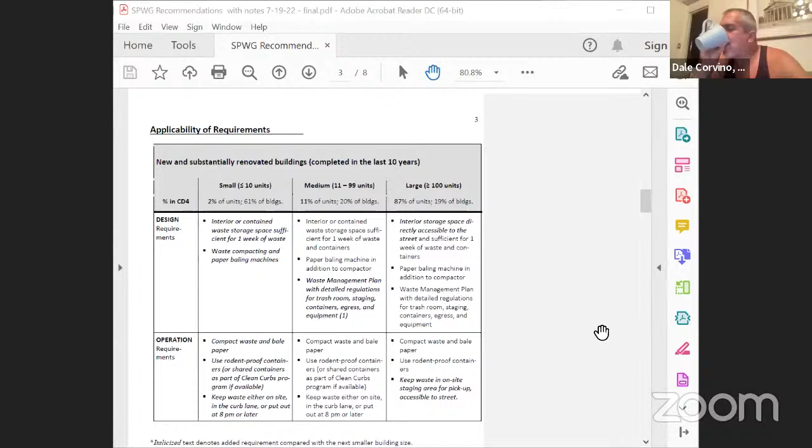What's interesting, when we did the surveys, and you'll probably see it later on in the proposal, CB4, 61% of our buildings fall into the smaller categories. 20% of the buildings are in the middle range, and then only 19% of the buildings are in the larger range, but they put out the most garbage.

But being that we have so many smaller buildings, 4-story, 5-story co-ops, condos, multi-families, they put out garbage. They put out less garbage than a larger building, but they do take up the sidewalk. So we're asking them, in new buildings and in renovated buildings, to consolidate, to use compactors and baling machines.

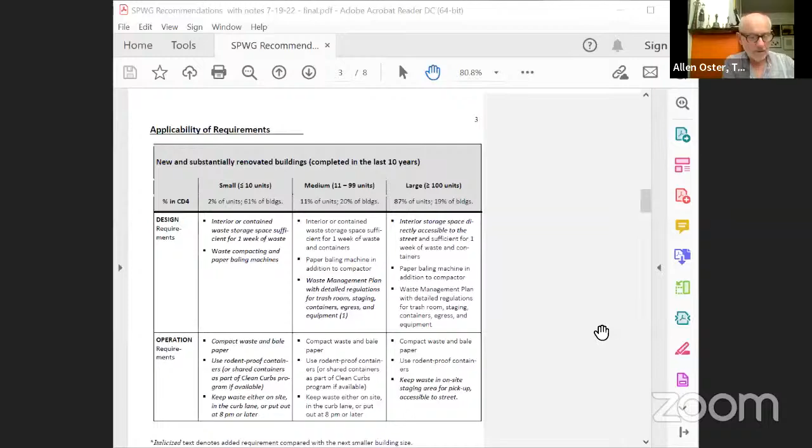So in existing buildings, we can't ask them to go in and put compactors in. It may not be financially doable for them to purchase and maintain baling machines, but these should be done in the medium and in the larger buildings.

One thing we talked about in terms of compactors, especially in the new buildings, is they do have compactors now that will automatically separate the various different trash and recyclables that go down the chute. A lot of the buildings that were built earlier, when they did start to put in compactors, were just for trash. You threw your trash down, and then you put your garbage in the compactor room, and somebody came around and collected it. The newer buildings that are constructed should have the technology that exists for them to put in chutes that change by the press of a button to accept cans, glass, and maybe even sometimes paper.